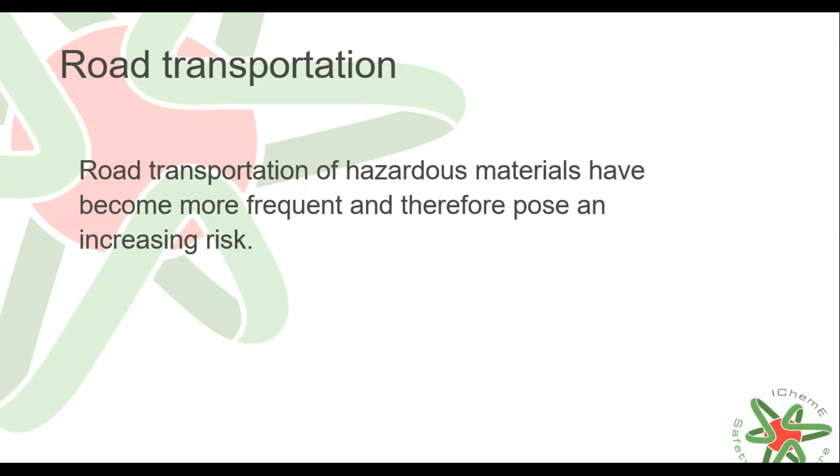And these events also need to be investigated to better understand the overall effects of such events and further improve emergency preparedness. You will see in the example about emergency preparedness what you can think about and what you should do about it.

So let's start with the first case, and I hope that you will finally hear me. I hope so. If not, then you can see the recording afterwards. I can't fix anything from my side, unfortunately.

So this first case describes an ammonia release. It was a very hot summer day. A cargo transfer hose ruptured shortly after transfer of anhydrous ammonia began from a cargo tank truck to a storage tank. So it's kind of a loading, unloading activity. A white cloud of anhydrous ammonia moved from the parking lot of the facility across the highway to a largely wooded area where it dispersed.

At the same time, a car driver traveling on the highway drove into this ammonia cloud, attempting to get away from it, got out of her car, but unfortunately she died. 7 people got slightly affected by the toxic material as well. So on the morning of the accident, the cargo tank truck arrived at the facility.

The cargo tank truck arrived at the facility, and the driver and his trainee checked in at the office. They were told to park their truck next to the piping manifold near a designated storage tank. After parking the truck, the driver picked up the vapor hose assembly that was lying on the ground next to the manifold and connected it to the vent line on the cargo tank.

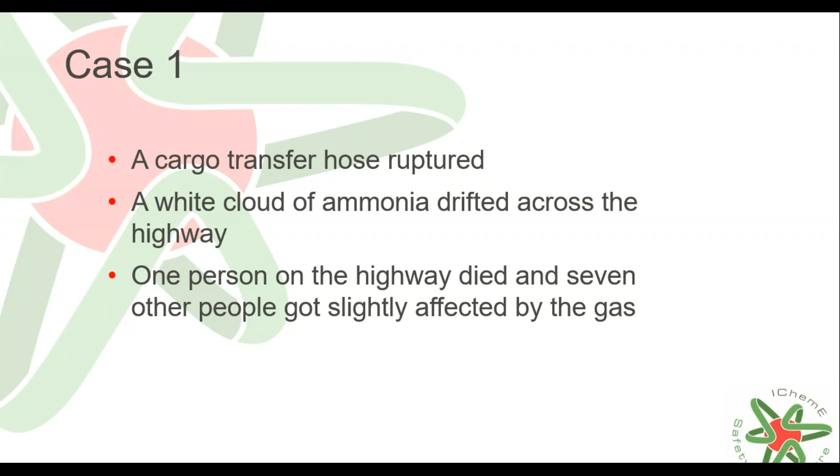The investigation found that the ruptured hose was designed for LPG transfer only, and we are talking about anhydrous ammonia that they transferred. It was constructed of several different layers of material, internal fibers made of PET, which was chemically incompatible with anhydrous ammonia. However, it was used to transfer anhydrous ammonia at least 2 to 12 times before it failed. The degradation and final failure were the direct result of chemical incompatibility.

Now, the hose for LPG transfer was originally assigned to another trailer, and it was imprinted with text "LPG transfer only." The text was not visible on the full length of the hose, however, only partially. The hose apparently was not inspected and tested before the accident because it was not considered in service. There was no procedure in place to define what in service means either. The transfer hose for ammonia was carried on the LPG trailer instead of the ammonia trailer. When making deliveries, truck drivers occasionally used facility-owned hoses instead of the hose on the cargo tank vehicle.

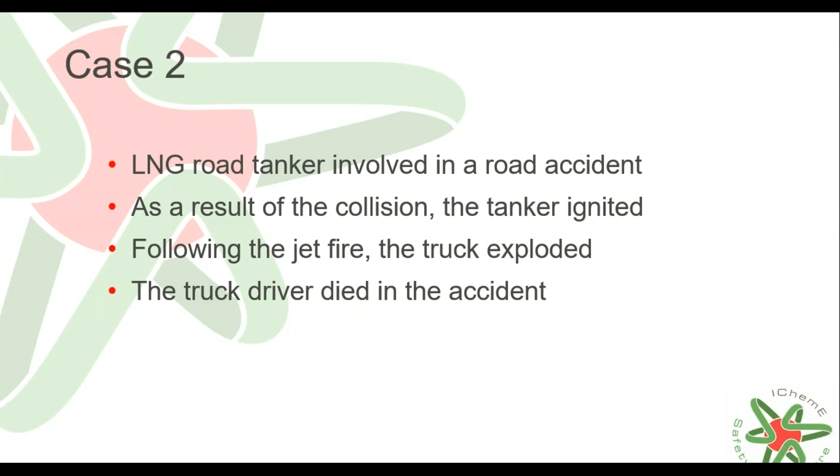So coming back to this LNG road tanker accident, I would like to highlight some of the key learning points. Even though the tank was insulated with polyurethane, the accident demonstrated that both the road accident impact and the fire can destroy the insulating layer. An important factor is the possibility of flames impinging on the tank wall. If it takes place above the liquid level, the wall temperature will rise, and even if safety valves are correctly operating, it is possible that the vessel cannot stand the pressure and explosion can occur at any moment.

The impact of such an event can be very serious, both in terms of the blast effect and the thermal radiation. That should be considered when intervention starts by firefighters. I'm pretty sure that you may have more learning points from such cases that you've come across in your operation or in your practice. And if you want to share them, please just type them in the question box.

Researching these kinds of learnings was quite difficult, I must be honest, because I haven't found really thorough investigation reports on such road accidents. And that was quite a big challenge for this particular safety lesson. It's not like the previous ones on different topics such as aging or creeping changes or flanges and flare systems.

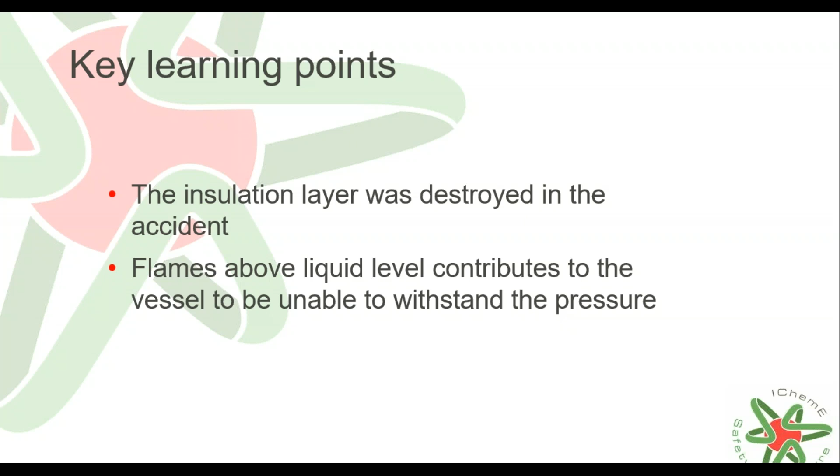This is something different. And we now arrived at the part where I discuss the What Can I Do session. In particular, today, this is about what can I do as a manager, as a supervisor, and as a driver or operator, and some aspects of the emergency response team, because it is always really important to highlight the importance of emergency response and emergency response plans, and so on. And this is all around the 6 pillars, the 6 elements of the IChemE Safety Centre's framework: systems and procedures, engineering and design, assurance, knowledge and competence, human factors, and culture.

And when you download the PDF version of the safety lesson, which is available both in English and Spanish, then you will see that all these recommendations are associated with one or two or a few of these colored dots that actually represent each element in this What Can I Do session.

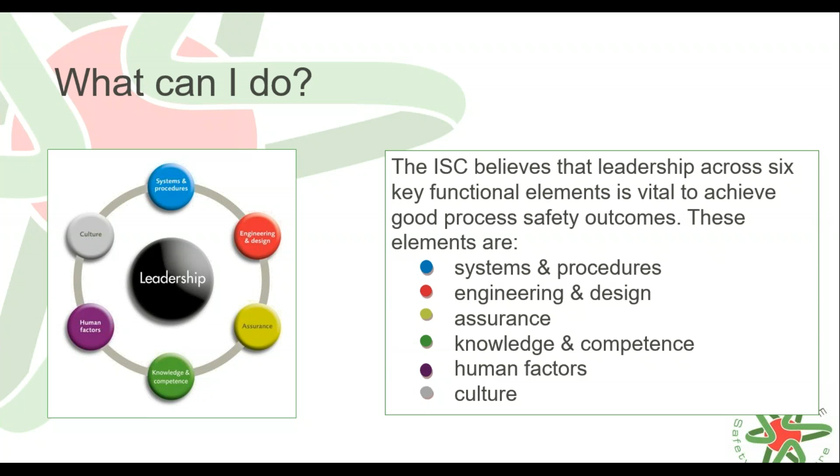Now, first, what can I do as a manager in such cases? Make sure that risk assessment is carried out for loading, unloading activities within the facility. I think it's quite obvious, isn't it, from practice? It's nothing new, it's nothing novel, but I wanted to highlight it because maybe it is forgotten. I don't know, maybe not.

When designing a new loading, unloading station, bottom loading is preferred to prevent falls from height during tanker loading. It also often provides quicker and safer escape routes than top loading. I wanted to add this as you know that the What Can I Do session not only refers to the case studies before that I analyzed and drew those key learning points, but they are coming from other background information, literature, and sources of information.

Make sure that operating procedures and regular trainings are provided to tank truck drivers. Loading bays should be equipped with alternative escape routes with emergency stop buttons. For toxic materials, automatic emergency shutdown should be in place.

So what can I do as a process engineer or a supervisor in this case? Make sure that the operator is conversant with the task, understanding the hazards associated with the particular activity, the risks, and the consequences of getting it wrong. So they have to have a basic understanding of what could go wrong, what is wrong with using the LPG hose

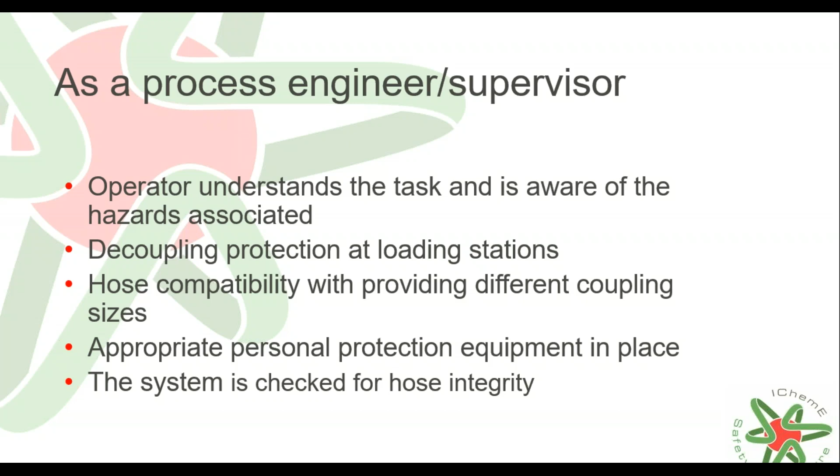What can I do as an operator or a driver? Make sure that you follow operating procedures when preparing and conducting loading or unloading operations. Make sure that the transfer hose assembly is the correct one to connect to the tanker storage tank to avoid chemical incompatibilities and potential release due to inappropriate coupling.

Check if flexible hoses are the correct ones, color-coded, selective, or clearly identified. For example, for correct materials of construction and correct end connections to suit tanker and plant. Check if the hoses are in good condition, not kinked, twisted, elongated, or damaged.

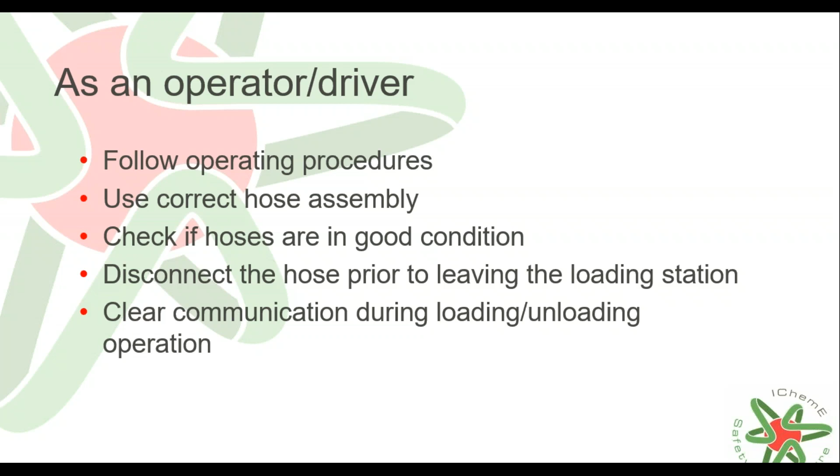Moving a vehicle while it is loading product or driving away with the hose still connected can have serious consequences. And make sure you communicate clearly when a loading or unloading operation is ongoing to prevent the truck moving from the bay prior to the end of the filling. So what else, as an operator or driver, can you do? Earth, ground, and bond tanker or road truck equipment and containers to prevent static charge buildup.

Drivers, deliverers should make sure that they are familiar with the emergency shutdown system in place, emergency warning, and access to emergency exits. In case of a road accident, make sure to set up appropriate safety distances and evacuate people from the vicinity of the release of hazardous materials from the tanker. And this is part of the emergency response team's responsibility as well. But the driver, if he or she survives the accident, must be aware of this as well, that they should evacuate as quick as possible.

Carrying a loaded truck is a very dangerous activity, and as such, be aware that you take all precautionary measures to follow the highway code to prevent road accidents. Make sure you receive training on risks related to the transferred product, safety procedures, and what to do in case of an emergency. Ensure the vehicle maintenance log is up to date and inspect the vehicle before driving it. Drive at a suitable speed for the task, ground or weather conditions, and at a slow enough speed to stop safely.